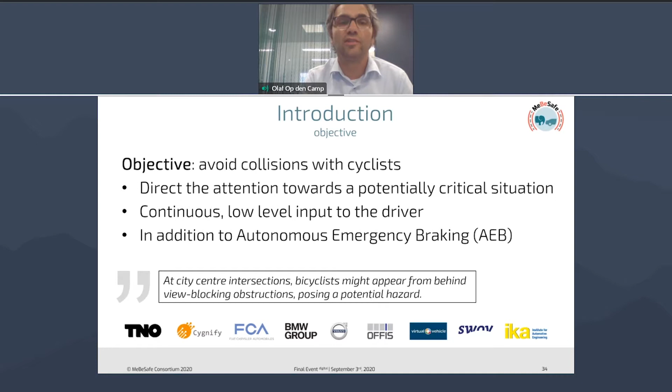If you get a flashlight every few minutes, then you might not pay attention to it anymore in the further course of the drive. I really need to stress that such a system is in addition to already available advanced driver assisting systems, not instead of them. Go to the next slide.

Because these current state-of-the-art advanced driver assistance systems already support the driver to avoid or mitigate imminent collisions. But these systems can only work properly when the safety margins already have become very small. So if the time to collision drops below about 2 seconds, then these systems might provide a harsh warning to indicate to the driver that the driver needs to take control and attention. But if the driver does not take over and the time to collision drops even further down to 1 second, then there's a real harsh response by, for instance, braking in an attempt to avoid the collision.

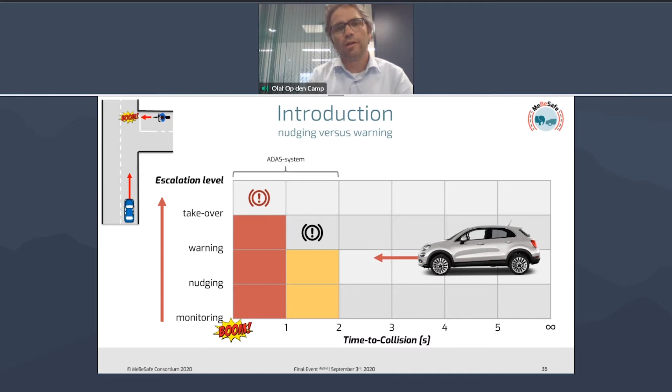Now, if we make one additional click, we see that in this project, we wanted to provide nudges in a way that the driver can better anticipate the environment on the road, all the different road users and potential hazards, and that safety margins stay larger, so that it's prevented that those small safety margins occur in which only harsh measures are possible. If we then click.

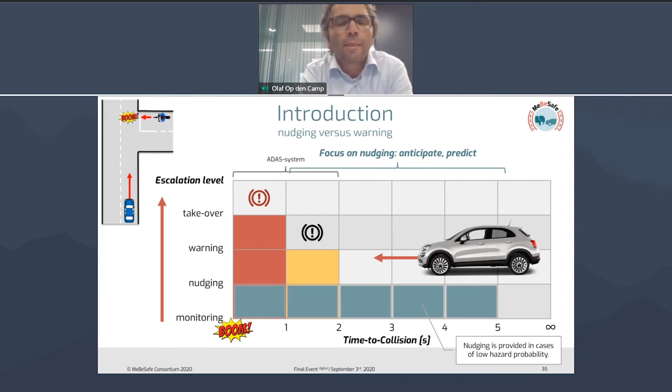To do that, we set up a system consisting of two elements. First is the information provision to the driver through a human-machine interface.

What you see here as a schematic is an augmented reality projection on the windscreen of a vehicle that shows a safe corridor of driving, where green indicates large safety margins and the yellow and red areas indicate decreasing safety margins. This is a possible way of nudging drivers to drive and behave safely on the road and pay attention to those areas that need attention.

So that's part of the HMI design in this project. But of course, the HMI needs to be provided with inputs to make sure that it changes with the situation. That's the lower part.

So we set up a static hazard model by identifying potential hazards related to the road layout and the traffic rules. We set up a dynamic hazard model that merges the static hazard model with actually perceived cyclists in the field of view of the vehicle. And we developed a cyclist prediction model to predict the behavior of those cyclists observed over the next seconds, for the HMI to better anticipate changes on the road.

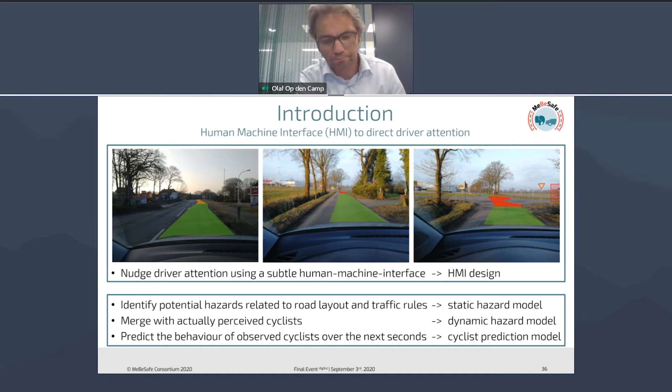Flow changes with how busy it is on the road. So during rush hour, you will have higher flows, which potentially leads to a higher level of hazard. It also requires the trajectory projection of road users, in this case cyclists.

Going to the next one. This is the system architecture that we set up and used. We make an implementation in an actual vehicle, and for that connect to the CAN bus of that vehicle, and this CAN bus contains the signals related to whatever the sensors of the vehicle see for traffic situation on the road. That can be radar, can be camera, and of course that is information needed as input to our system.

We connected that to map information to get a better view on the infrastructure layout, and we use OpenStreetMap for that. Here you see different blocks that make an interpretation of all that type of information coming from the information layer as output to the decision and control logic of the HMI.

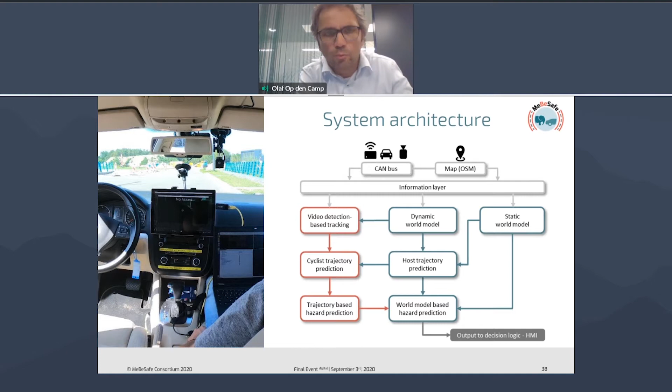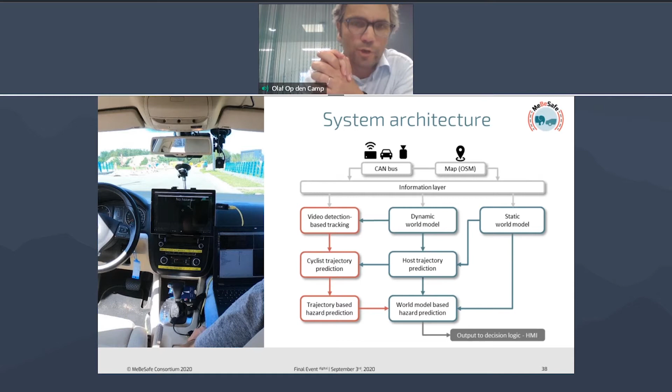Now in red, that's the branch more dedicated to actually predicting behavior, and the blue blocks are more dedicated to the static and dynamic world model. If you go to the next slide,

then this is the approach that we followed during the project. On the left-hand column, you see the actions that were actually needed for getting access to the sensors of the vehicle, to set up the different models, to design the HMI, and to implement the complete integrated system into a vehicle. But we also had, and that was very

worthwhile in this project, an additional task as a parallel path: a selection framework where we used a simulator to be able to select the best possible option for an HMI to be implemented, and we used simulations to calibrate the different models that we used.

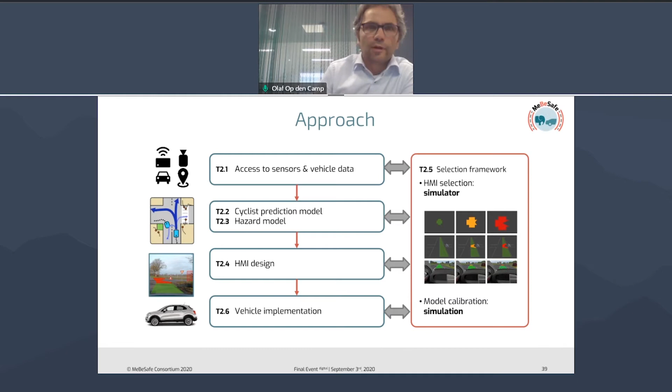Go to the next one. So I will go now through each of these different tasks and show the results of these tasks before showing the results on the road.

Several of them were intended to be included in the cockpit view of a vehicle, and others which we expect to have a better effect on drivers as a head-up display in a vehicle.

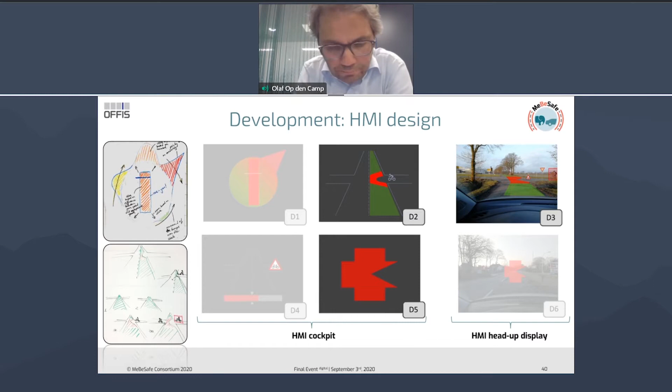On the next slide, you will see the HMI selection that was actually performed in a driving simulator study by CRF in cooperation with FCA. That driver simulator study was used to evaluate the driver's visual behavior and judgment with and without a nudging HMI, and to determine the effect of the different previously presented HMI options in that simulator.

There was an eye tracker included in this study to see what the gaze direction of the driver in all these different tests was, to get an indication if this HMI would be able, at least in this test setting, to direct the attention in the correct direction, or the direction that was indicated by the HMI.

We used really common accident scenarios for cyclist to car interactions, and indeed it was shown by CRF that the augmented reality option in the lower part had a really good effect on directing driver attention. But good to know here, and also already as a result of this study, it proved that the other options also had a significant positive effect on being able to direct the driver attention.

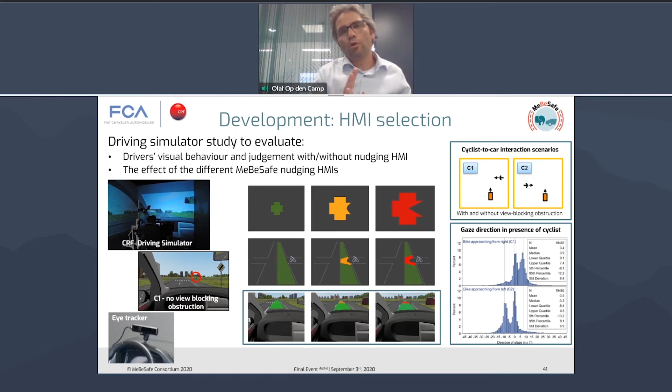So that was more on the HMI selection. If we go further, we find some development on the static hazard model performed by TNO, where a hazard is a product of 3 different factors.

I would like to focus on the third factor, the probability that a cyclist appears at a certain intersection based on flow data, for which we performed measurements in the inner city of Eindhoven for a very typical intersection. You see in the center graph the flow data of cyclists making different maneuvers at that stage over a period of 1 week. We used those flow data in that static hazard model.

You see the result of that static hazard model in the right graph as a purple line, escalating the hazard from, let's say, a distance of about 40 meters in front of the intersection, peaking at about 15 meters before the intersection.

But of course, this hazard escalation very much depends not only on the potential hazards in the environment of the vehicle, but also depends on the velocity or selected speed by the driver in that certain situation.

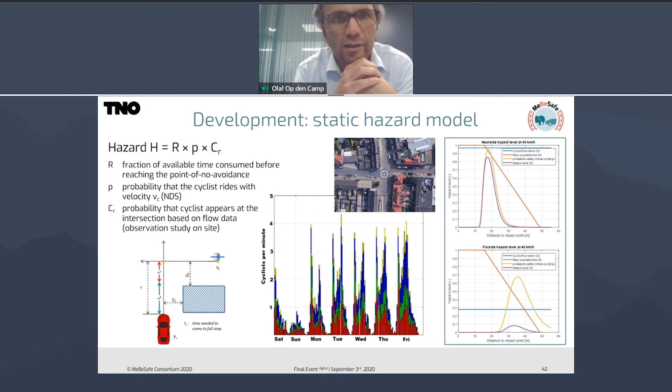Now, if we look to the next slide, it was a virtual vehicle that used this static hazard model to evaluate more than 20,000 conflict situations to see how the hazard model behaves in this type of situation.

There we concluded that because of the way the driver behavior was modeled, in this case the static model underestimates the hazard level, although in reality cars hardly brake in such situations where a higher hazard level is then indicated by the model. Very valuable information to be included and calibrate our static hazard model.

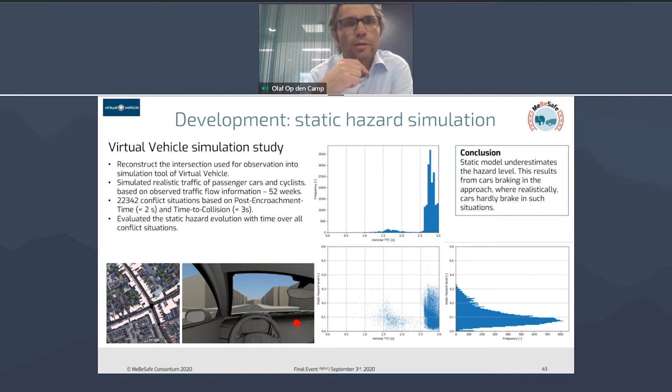In the next one, we see a result of the stochastic simulation study that was performed by BMW Group, looking more at the dynamic hazard simulations.

Also here, many simulation runs were performed, and just one of these results showed that at a time to collision of 3 seconds, so reasonably close to a potential accident, natural variations in speed of vehicle and cyclist only lead to a collision risk of about 25%, which also indicates that this uncertainty makes it very difficult to predict the actual collision risk at an early stage.

And if you click one step further, it also shows that current ADAS systems are not able to address this fully, but that nudging in this case is a very valuable and valid option to be included.

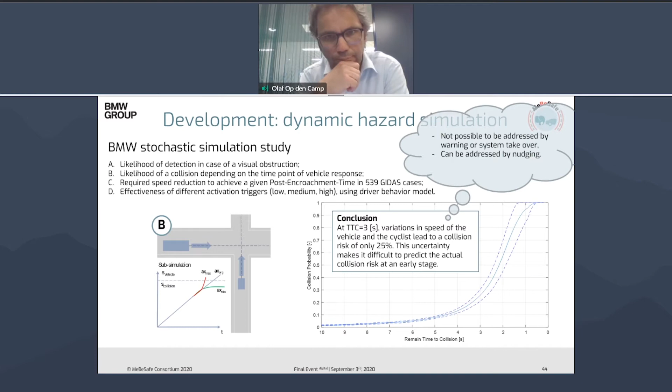Going to the next one, here you see the actual implementation in the vehicle with a very good collaboration between FCA, Cygnify, and TNO.

You see a kind of head-up display with the selected HMI option that was mounted as a retrofit option here between the steering wheel and the windscreen. In the end, we were able to make it so that the HMI was shown in the direction of where the actual hazard could be seen from the driver's perspective.

We mounted many different cameras in the vehicle: 2 cameras directed towards the driver for Cygnify to analyze the gaze direction of the driver during all the different tests, and several cameras directed to the outside world as a kind of context for the complete test.

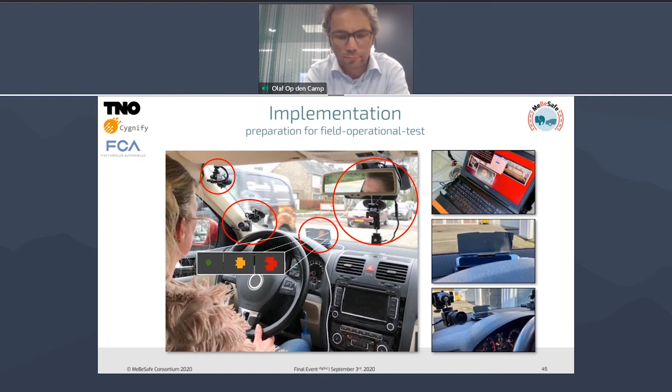Go to the next one, and we see that we used this vehicle with the complete setup of the system in the field operational test in Eindhoven, where we asked 23 naive subjects to run the car over a route of 32 kilometers, and each round consists of 74 intersections, so 74 possibilities of potential hazard.

We ran 2 rounds for each subject: 1 round was driving with the nudge system engaged, and 1 round was done without any nudging, to have a baseline to see what the difference of the nudging would be compared to the baseline situation. As indicated, we measured the gaze direction and the response of the driver, let's say in speed selection, for each of the intersections, to get an impression of how the driver responds to the nudges.

In this case, as a field operational test, we really staged the stimulation. You see that in the bottom right graph, where at about 45 meters before the intersection, the schematic representation of the intersection as a cross turns from gray to green, and the closer the car moves towards the intersection, the larger the cross in the HMI becomes, and the color changes from green gradually to red. We did that to make sure that all the subjects received the same type of input for each of the different intersections.

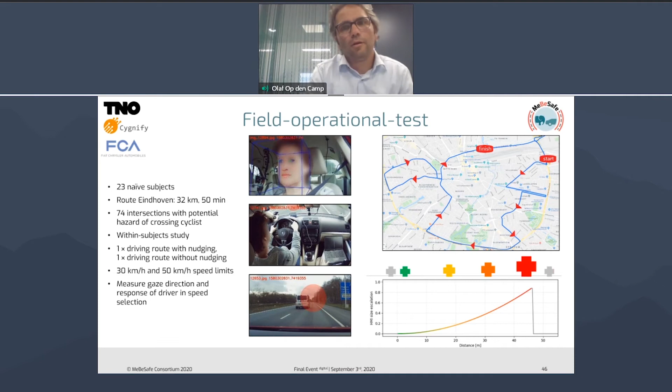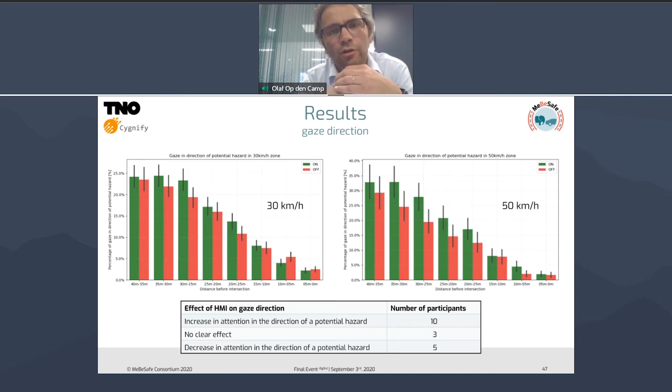We also studied the effect on individual participants, and that result is shown in the table below. We see that for 10 out of 18 participants, they increase their attention in the direction of the potential hazard with the HMI switched on. There's no clear effect seen for 3 participants, and in 5 cases, we see a slight decrease in attention in the direction of the potential hazard using the system.

We not only looked at gaze direction, but also at speed in the next slide, because speed selection, of course, also indicates how a driver responds to certain inputs.

Here it's seen that although it's not significant for the 30 km/h zone, still in the approach towards the intersection, the speeds with the HMI switched on were slightly lower than those with the HMI switched off. That was actually significant for the 50 km/h zone, where a 1 km/h decrease in speed was seen on average, on an average of about 39 km/h.

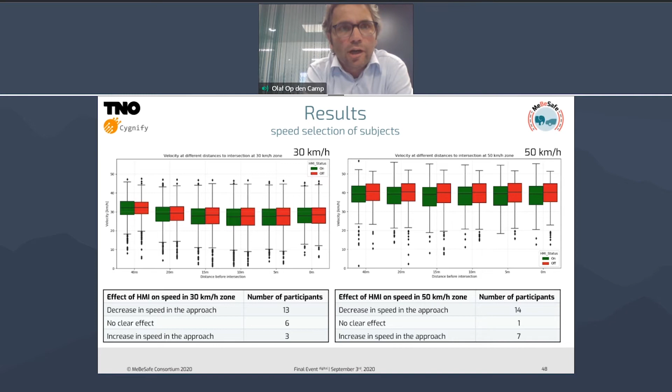Also here we looked at the individual participants, and we see that most participants decrease their speed in the approach of an intersection when the nudging HMI is switched on. This brings us to a kind of overview of the results on the next slide.

I think the most prominent result is that at least in this reasonably short test - the test took about 2 hours for each participant to make those 2 rounds in Eindhoven - for 56% of the drivers, they look more in the direction of the hazards as a result of the nudge. So we can certainly conclude that more than 20% of the test subjects increased their level of attention in the approach of a potential hazardous intersection, as was indicated as one of the objectives of the MeBeSafe project.

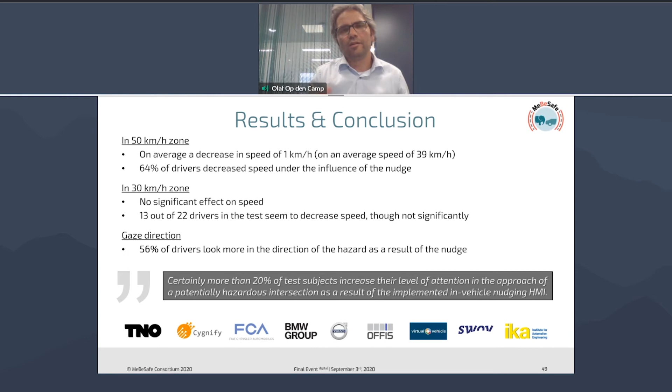Now, of course, there's many things to say to that. We'll come to that on the next slide.

In this case, the HMI escalation was fully GPS staged, but even in this case, with a low level input to the driver, we've actually asked the different drivers their opinion on how it influenced them, and they didn't feel any harsh interaction with it.

So even if the HMI escalated 54 times during the route, it stayed very effective, at least during that one hour period of time. There is uncertainty, of course, because of the way we were able to set up the field operational test about the long-term effects. What is the habituation of drivers to such effects?

We have to see how the effectiveness might decrease over time when drivers get used to these inputs. But the system is already developed in such a way that we are able to inhibit the HMI escalation and increase effectiveness using the static hazard model and/or the dynamic hazard model. So if we include possible hazards in the field of view of the driver, that requires a cyclist prediction model, and I'd like to share the floor with Bram Bakker from Cygnify who will shed light on that part of the project.

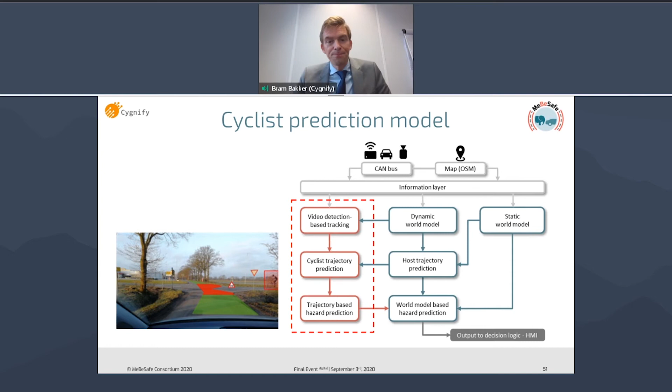Next slide, please. So this slide is about the roles of the various partners involved. Cygnify developed the core vision and prediction technology, deep learning based, which is our specialty.

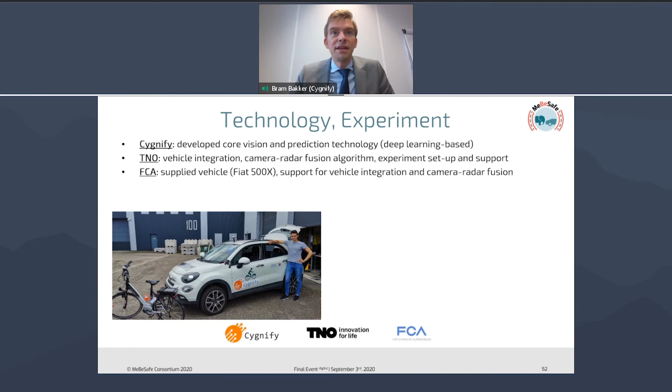FCA finally supplied a very nice experimental vehicle, a Fiat 500X, and support for integration and the radar work. So based on this combined effort, we did a structured controlled experiment very recently, end of July 2020, with simulated intersections and car-bicyclist interactions on the campus of TNO in Helmond.

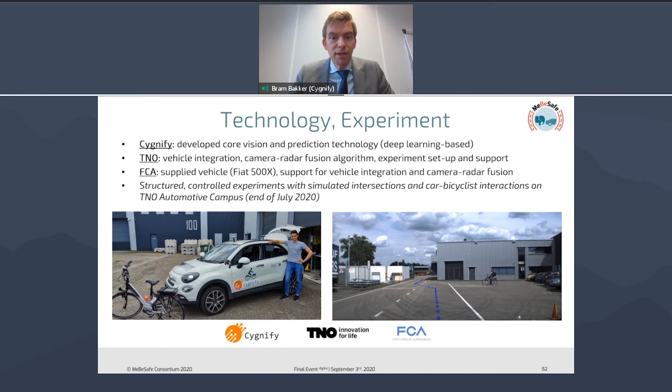So it's very much complementary to the field operational test on real roads that Olaf described in the previous part. Next, please. Here's another view of the Fiat vehicle, indicating in particular the sensors and other special hardware we used. We're highlighting some cameras here, the radar, and also important, the OxTS high accuracy location technology, which we use both for the vehicle and for the bicyclist to have really precise ground truth data about their trajectories.

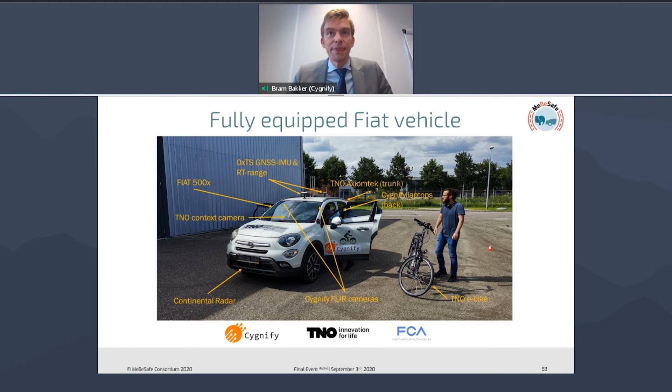Which is important for this type of evaluation. This picture also shows Alexis from TNO, who did a lot of work as well and was also the bicyclist. So as usual, we let the young kids do most of the work, and especially the dangerous job, in this case riding the bicycle. Of course, it wasn't really dangerous. We had a qualified test driver behind the wheel of the Fiat, and we made sure all the situations were completely safe.

Next, please. A slide about the advantages and disadvantages of this choice for a structured controlled experiment. Like I said before, this is very nicely complementary to the real-world field operational tests we performed with naive drivers that Olaf talked about. This is really focused on a controlled set of known hazardous car-bicyclist interactions. An important advantage of this type of structured experiment is that we can obtain as much data as we like on such interactions.

And those interactions are, during normal driving, very rare, fortunately. But in such a controlled experiment, we can simulate them as much as we like without actually encountering real danger. Another important advantage is we can get really precise, solid knowledge on the ground truth bicyclist intentions and behaviors, and also the ego vehicle patterns. And a final practical advantage is that we can use an experimental vehicle without road legal permissions and license plates.

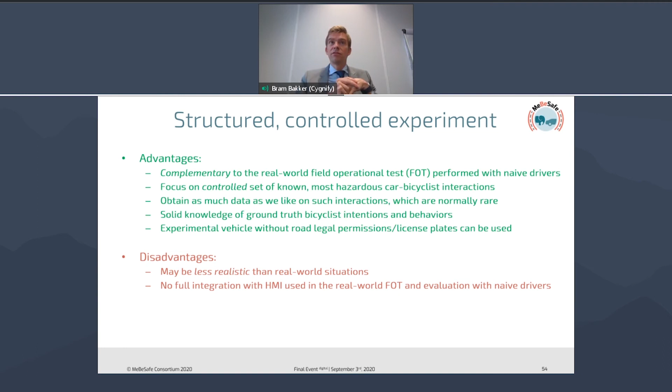Disadvantages are there as well, of course. A danger or risk is that, in such a controlled experiment, the data might be less realistic than in real-world situations. We've tried to avoid it as much as possible, but it is, of course, a risk in this type of work.

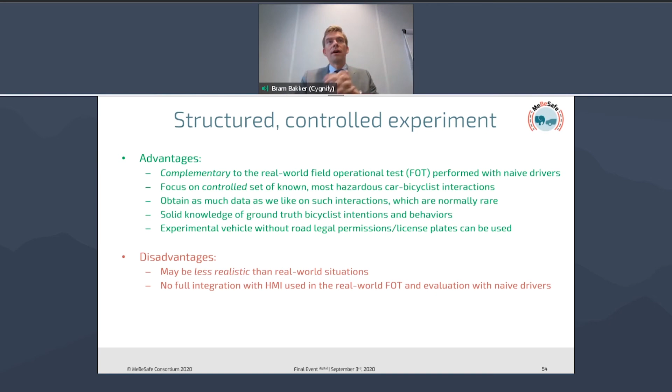But overall, in balance, it's definitely a good choice, I think, to do this type of work in a structured controlled experiment.

This slide shows the various scenarios we tested. Those were derived from earlier knowledge on an earlier project, in which TNO and Fiat were also involved, on typical scenarios or interactions between cars and bicyclists which relatively often lead to hazardous situations and accidents.

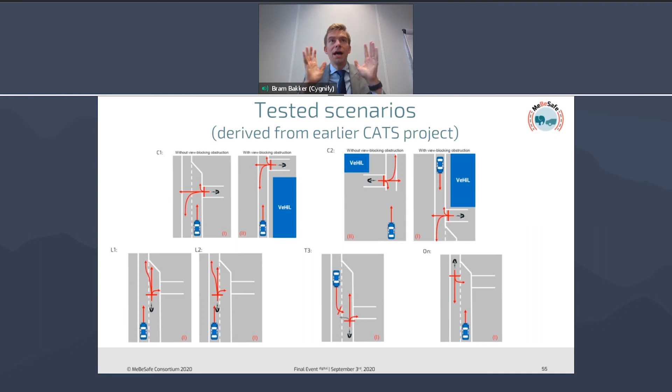You can see different types of situations, like a bicyclist coming from one of the other sides of an intersection, but also situations like the bicyclist coming from the side or from behind the ego vehicle, or approaching from the front and making a turn in front of the car. Different types of scenarios which we all tested in this work. I won't talk about all of them in detail, but this is just an overview. I want to highlight that these are really the most relevant scenarios in terms of accident risk.

A few words about the relevance and complexities of this prediction problem. Road user behavior prediction in general is one of the big outstanding problems for ADAS and self-driving car technology. In fact, there is some more emerging work coming, including from very large companies like Waymo and Uber, about this type of road user prediction. It's really a big open problem in this space.

For bicyclists, even more so than usual, and there's a couple of reasons for that. One of them, maybe the less important one, is that sensing bicyclists accurately is relatively difficult compared to cars, depending a little bit on the viewing angle. More importantly, bicyclists have very fast and flexible trajectories, and their trajectories are less constrained than those for cars. They don't necessarily follow the traffic regulations very precisely. So there's really a lot of variety in the types of bicyclist trajectories one can observe.

We'll see later examples of that actually in other presentations later today. All this makes it really difficult to predict them.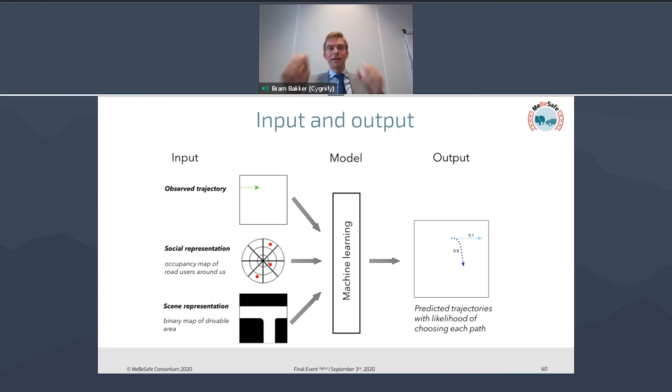The output that we produce are actually predicted trajectories with the likelihood for multiple possible paths. And this is important. So we're not predicting just one most likely trajectory, we're predicting multiple likely trajectories. Next, please.

Basically, the first step in this approach is that we have a high-level network which predicts for an intersection, okay, these are the likely high-level destinations on an intersection, and there can be multiple of those. So, for example, bicyclists might go straight, or you might make a left turn, and we make predictions for each of them. So this first high-level network predicts, okay, these are the various high-level options, basically. Next, please.

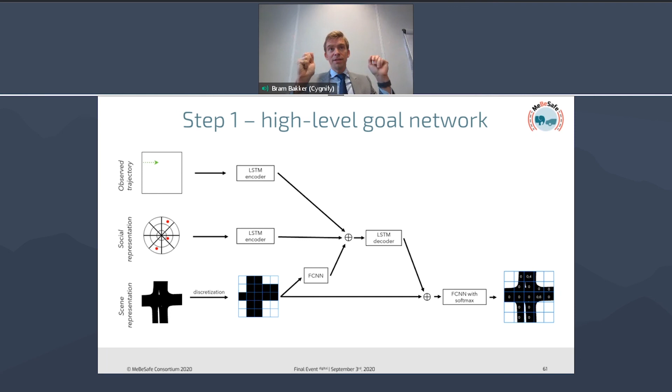And in the second step, a low-level trajectory network takes for each of those high-level destinations the inputs and predicts, okay, what is the likely low-level trajectory for that high-level destination. So that is the one responsible for really making the precise trajectory path prediction. Next, please.

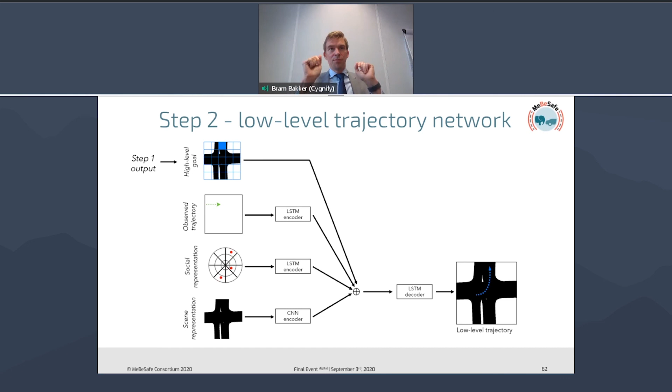Here is a demo video screenshot, and the link is provided here, and I recommend checking it out. It nicely illustrates what it is about. In the bottom right corner, you see the detected and tracked objects, in particular the bicyclists.

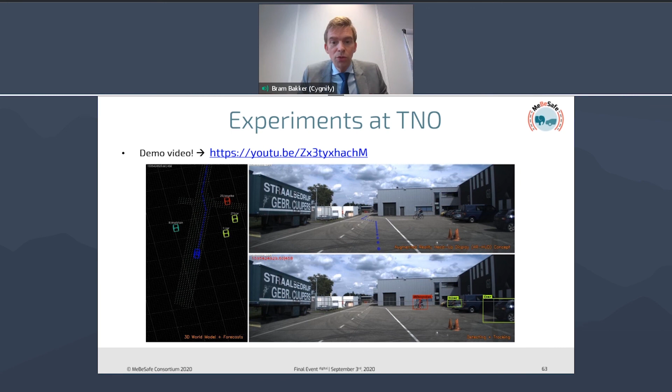And these objects are positioned in a 3D model shown on the left, together with a simplified HD map. And on there you can also see the simulated intersection and the various tracked road users, and also the ego vehicle in blue and its intended trajectory with the blue dots there. Next, please.

And this slide then shows an example of the prediction and the hazard detection. So on the left side, you see these 5 white dots, and they represent the predicted high-level destinations at that point in time. And then you see for each of those the predicted low-level trajectories as well, like these little paths consisting of small white dots.

And the hazard estimation is done by a formula taking into account whether a predicted bicyclist trajectory path intersects with the ego vehicle path, the probability of that predicted bicyclist trajectory, and the time to collision if that situation would materialize. And the highest hazard in this case is highlighted by the red trajectory.

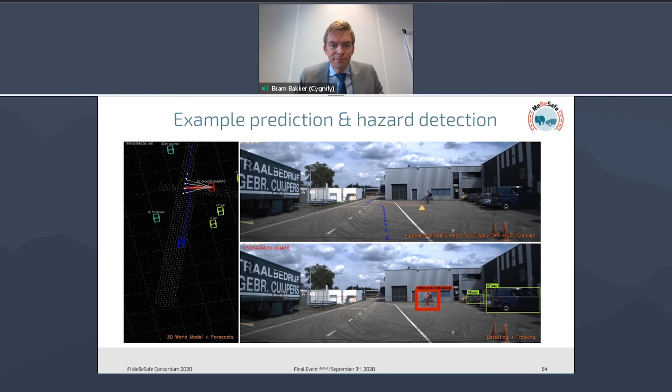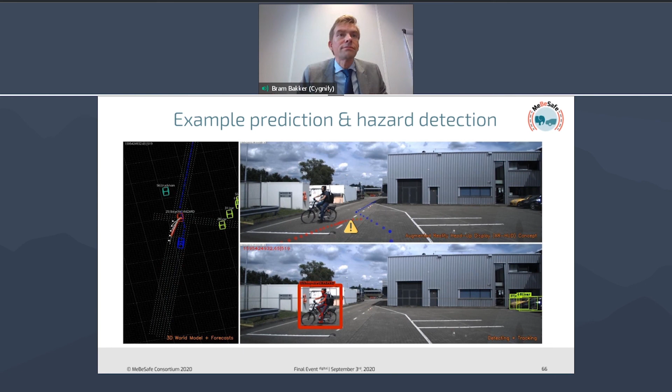Next, and here's another example of just prediction later in time. So the further in time we go, the more precise typically the prediction gets. So now we're more certain that the bicyclist will actually make this left turn. Next, please. And here's a final one. It basically shows the same principle again.

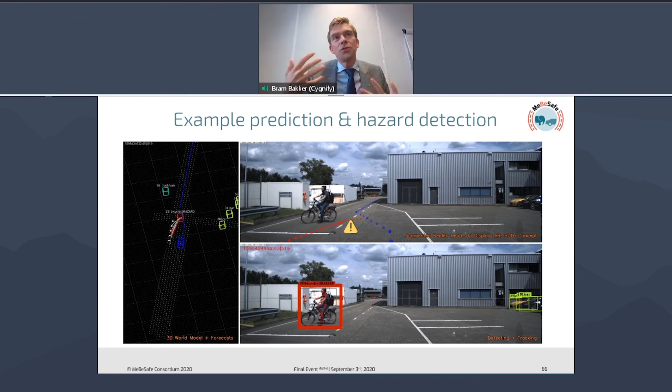On the top right, we see a kind of concept of an augmented reality head-up display HMI solution, similar to what was described earlier by Olaf, where you might highlight these hazardous trajectories from the bicyclist and also highlight the trajectory itself, hopefully in a kind of subtle nudging way. Next slide, please. It's my final slide.

So first of all, we demonstrated the soundness of the multi-level prediction methods that I just briefly described here. We demonstrated the feasibility of the hazard detection and the warnings derived from this. We demonstrated the real-time functioning of this, and we demonstrated using post hoc processing really how such hazards could be used in an HMI. Next, please.

In terms of expected value, we've collected lots of data and metrics, and are still in the process of some of the final analysis, to be honest. But one metric is really particularly interesting to highlight here. We find that the first valid hazard warnings are given typically between 3.5 and 5.5 seconds away from the potential collision points. So this means that the driver would still have about that time to react to it.

And this is very nicely in line with the envisioned proactive nudging time zone that we have been aiming for in this project, and that Olaf talked about before as well. And so we're quite happy with this result. Thank you.

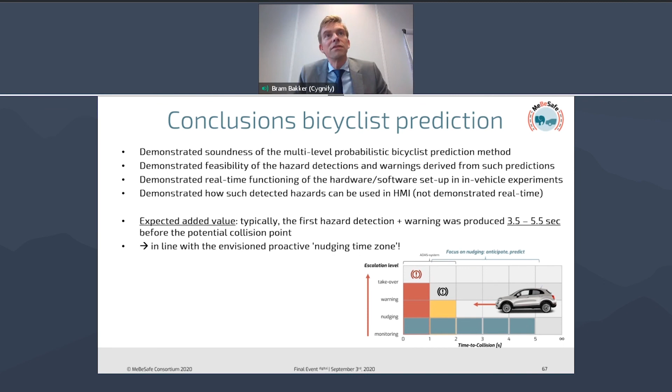Yeah, thank you. First of all, Olaf and Bram, for these really well elaborated insights into this work package on in-vehicle nudges.